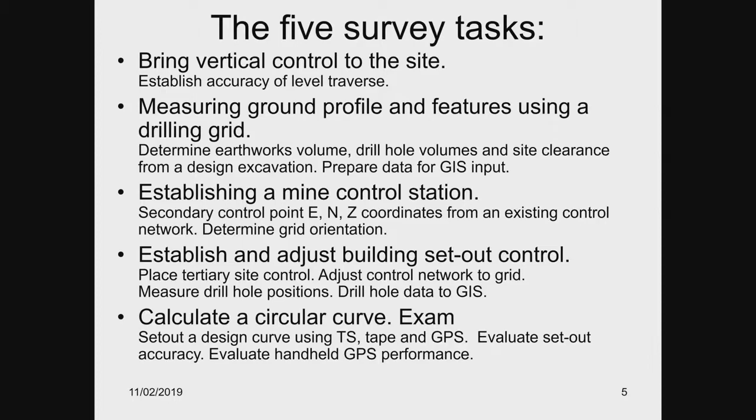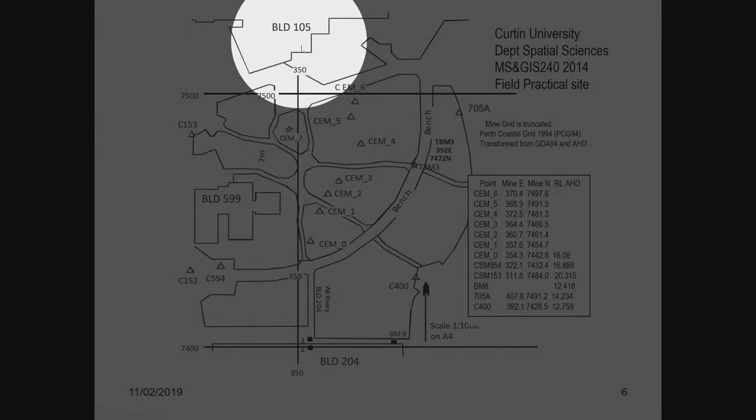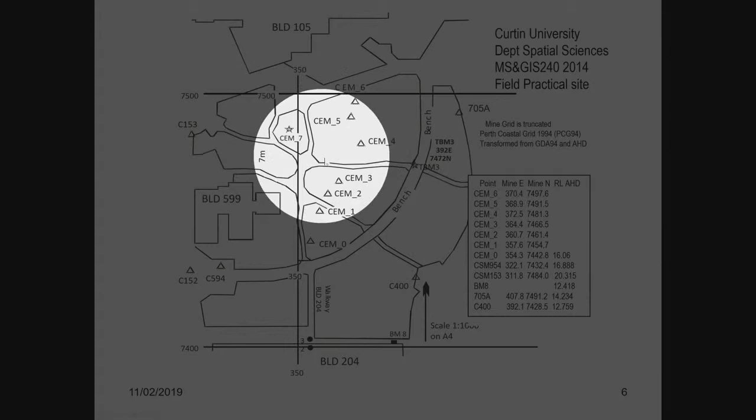So that was our site, building 204 with the engineering building, the library up there. There's 100 metres from there to there, 50 to 60 metres wide, and we were eventually working on that area there where we would put a mine grid. You can see the local coordinate system that I have in there.

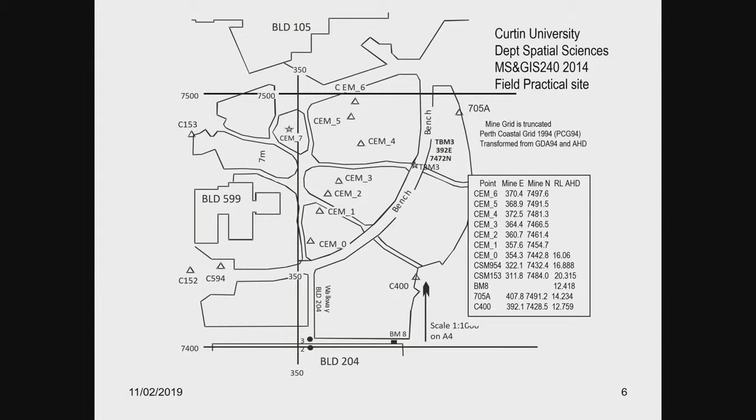These CEMs were just pegs that I put in the ground so that the students had to find the peg, do a site plan so that they could find the peg next time when they did it, because they would have the coordinates of it.

And the first exercise was a couple of things. We did a collimation test to make sure the level was working correctly within tolerances, that it didn't have errors in the line of sight.

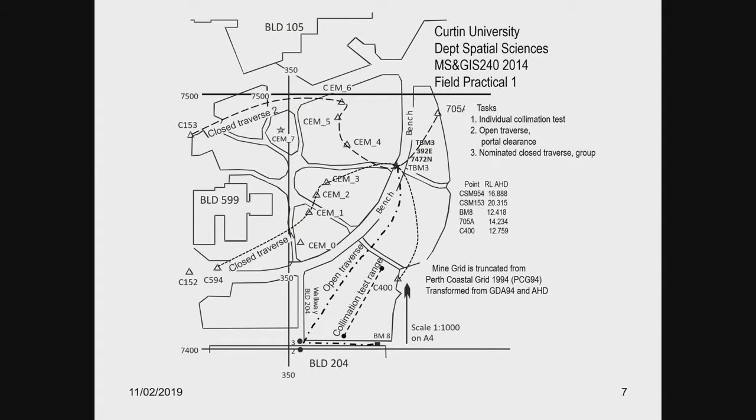We then did an open traverse, and I'm just getting used to this, from here up to a control point up there, a temporary benchmark.

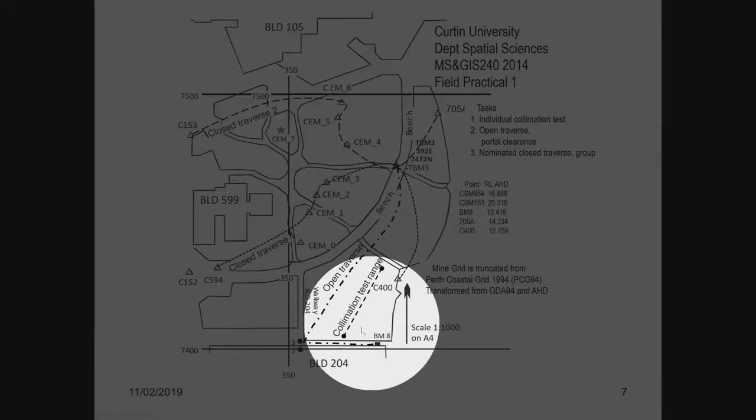Now, and also we've got a bridge across there, that's a portal. How do you find the height of a portal? There's I need 3 metres clearance for the material, for the machinery. Does that portal meet it?

And then we wanted to bring control in, so starting off at a control point, coming down, winding up somewhere else to between two control points, so that we could then do a closed loop traverse, which would allow us to see how well we had performed the survey. Did I get within - I'm allowed a tolerance of 15 millimetres around the circuit - did I achieve that? If I didn't achieve it, what do I do about it?

And so this was the closed traverse, and this was the first one because that one then allowed us to have control for the second stage, which was the blast grid. 6x7, which I'm reliably informed is a grid dimension. Is that right or wrong?

Okay, happy enough? Okay, not every student did that. We then had to split the teams because I'd be running about five teams of 4 students for this. So we give them a couple of lines to do.

They could collate that data, then they would have to share the data with someone else, which is all part of probably the team building thing that we're trying to get people to work together, to share the data that they've got. And then when you do that, you've got to make sure your work's all right because you're going to hand it over to someone else. And if they don't trust you, well, the whole thing's not going to work.

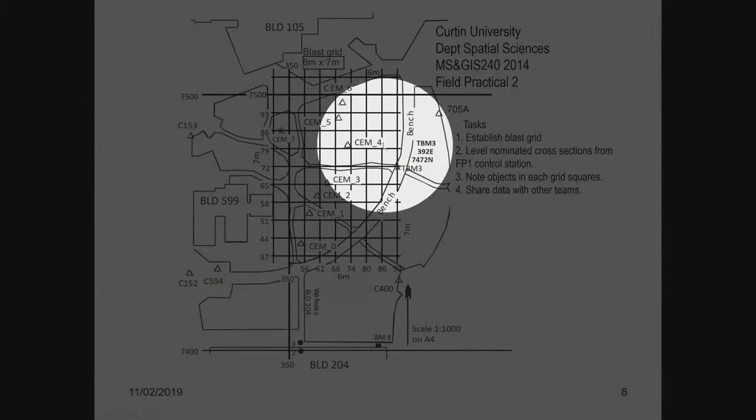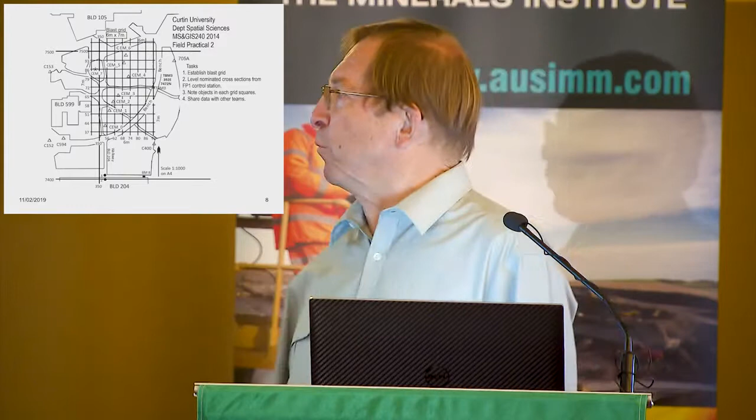We've got a bench running around there at about 15.5 metres or something like that. What volume, if I put some batters in my GIS and excavated down to the bench, what volume? What volume of drill hole? How big a drill do I have to use? I've got no clue. What size rotary drill do we use there for blasting, if this was blastable ground? Do we use a 10-inch or a 2-inch or what?

Those are the questions. Kids, what size drill do we use? How much do you pull out of the ground? How much spoil have you got to go back in? So we were looking at that.

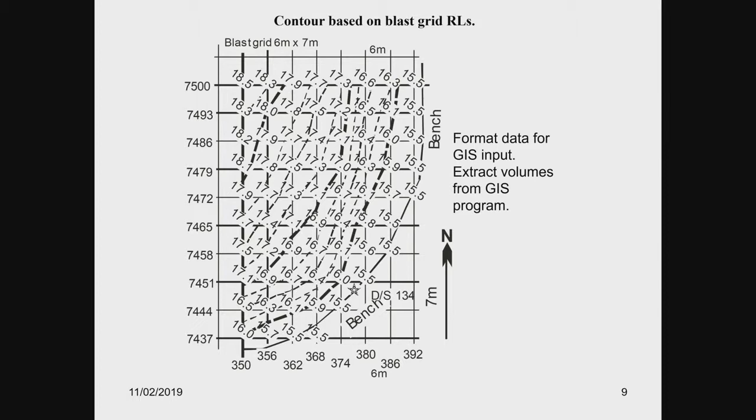From that, that's roughly what the ground looked like with the levels. And from there, if we're going down to the bench, we can calculate the volume in various methods. We can use the contour method of volume, or the depth method from each corner. Those things are done to death in the book on how they're actually worked out. So that would go into the GIS for them to pull it out.

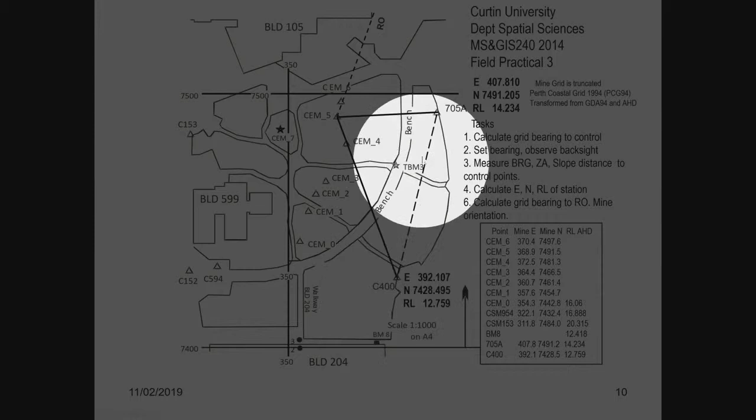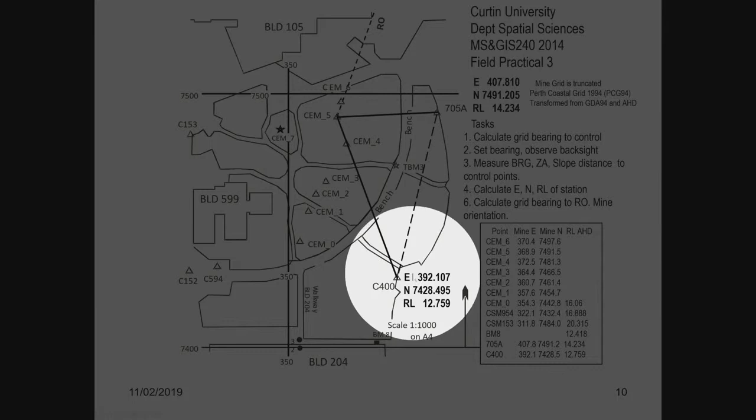The third one was, now let's get some control into place. I've got 2 control points there. They're in my local coordinate system, which have been tied back to the Perth coastal grid, which have been tied back to GDA, Geodetic Datum of Australia. We said to them, well, here's some points. They're about the coordinates. We had a surveyor run round and bang some pegs in and get some rough coordinates.

So what the students are expected to do, when their group is assigned to one of these points, is work out the rough bearing from your control points, CEM5 in this case, to 705A, so that when you're pointing at 705A, you can dial that into the total station. You then have orientation. We put a reference object, an RO, which was the side of the building here, so when they come back in the field the fourth time, because they can't see 705 and C400 because the bulldozer's gone through them, they've still got an RO.

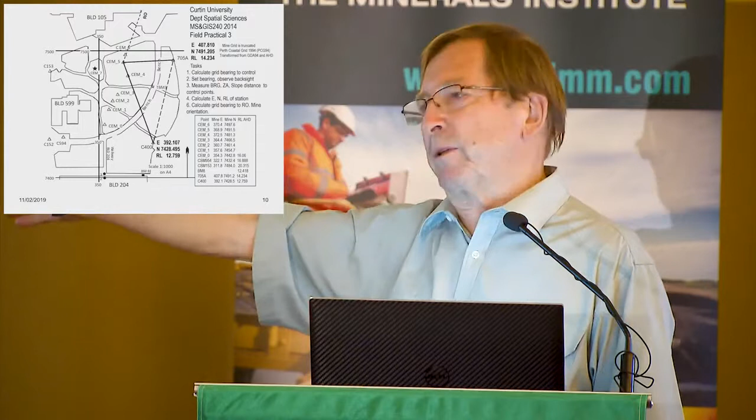They've calculated a better position for CEM5 because it was only rough. They've then been able to calculate an accurate RO, so that gives us our mine grid orientation. And that was basically that exercise.

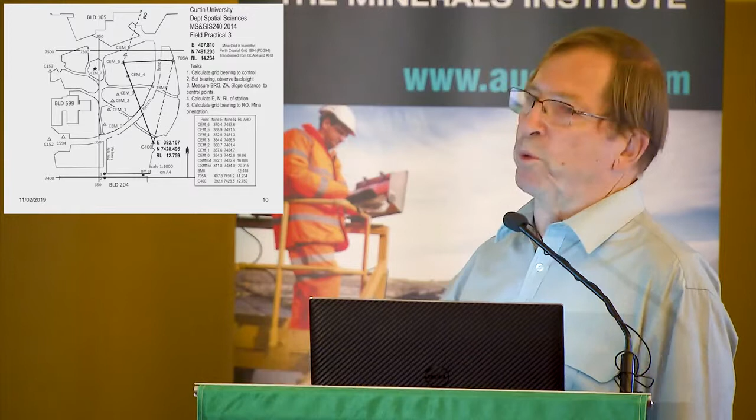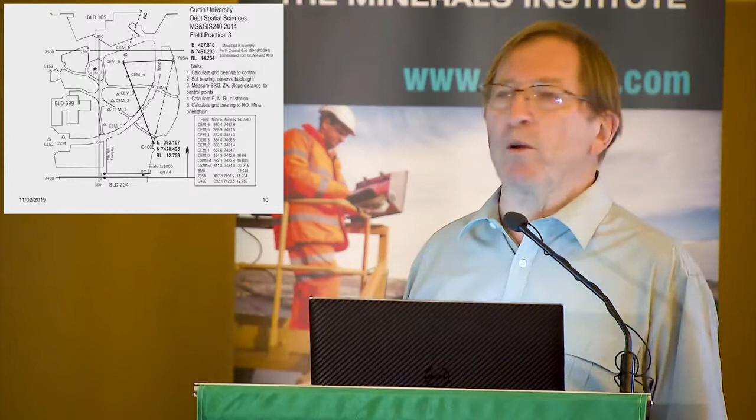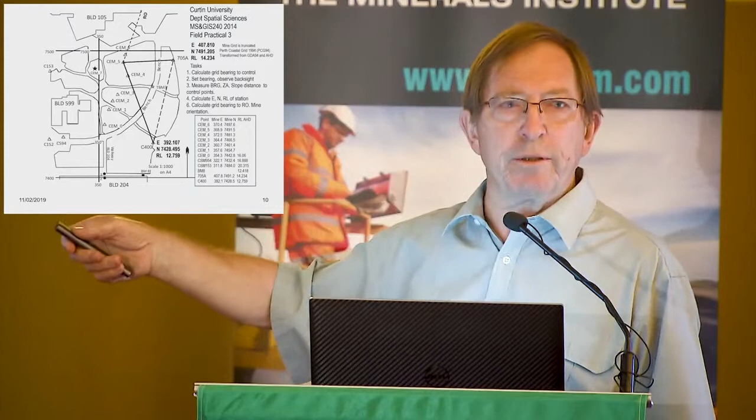Record the points so that you can do your station diagram to come back to it next week and basically find out where I am. CEM5 was part of the initial level traverse that we did, going back to the known coordinates and height of 705A and C400, doing a zenith angle and difference in height. How did my level traverse compare with what I did here?

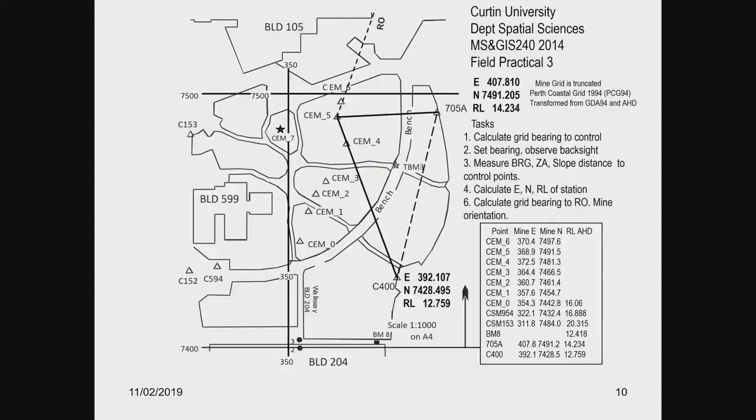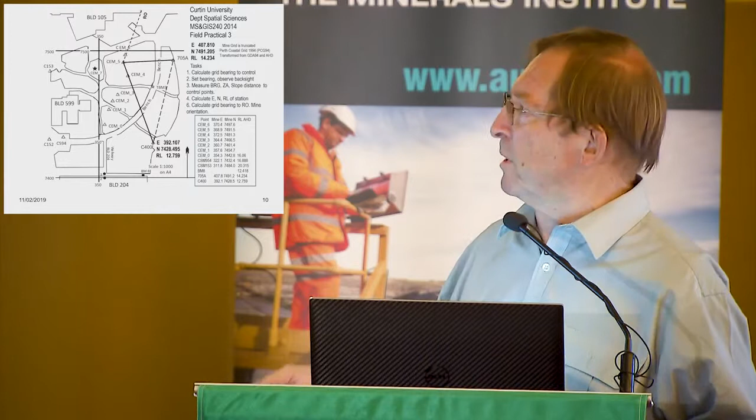Again, the idea is to show that there's more than one way of finding out an answer to any problem. Surveyors are very funny people, always employ a lazy person because they find the easiest way to do it. Except Chris has got a bad story about that. But there are more ways of solving a problem than one.

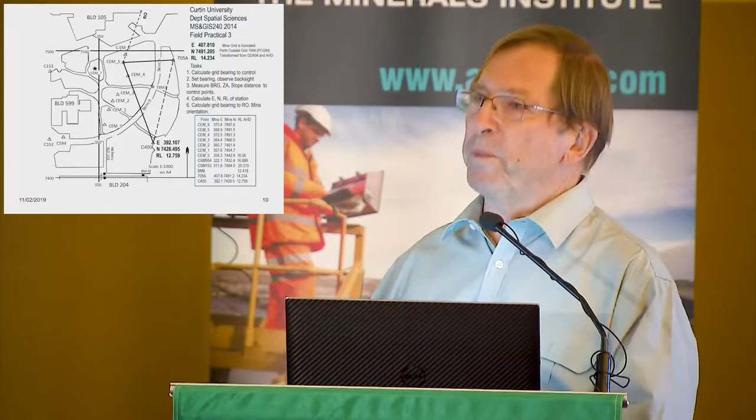Okay, so this is the third practical. We've established our control.

The fourth practical: we set up on the control point again, but now, because we've found out where our 3 drill holes are, it looks as though we might want to use that position. We're going to lose our control point, but we need extra control because we're going to put a structure there.

So we go and do a small survey from the unknown point. We've got our bearing up there, and we do a triangular survey around there, using what we call the Bowditch adjustment to get the best position for the coordinates.

So the tasks are: set the grid bearing to the RO. We know what it's meant to be. Align the total station to it, tap the numbers in. We've now got it lined up.

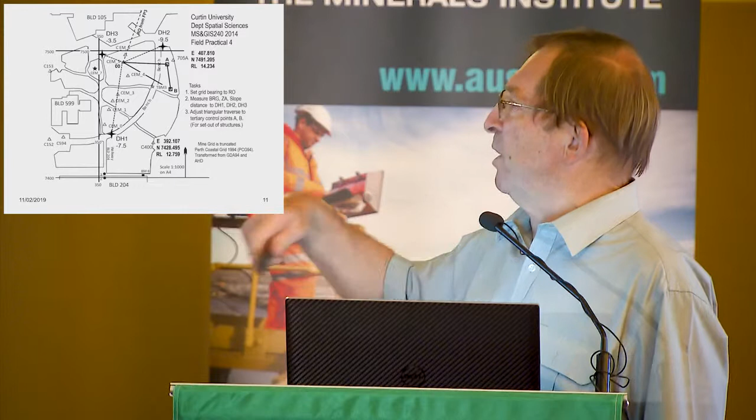Measure the bearing, the zenith angle, and the slope distance to the 3 drill holes, then measure and adjust the triangular traverse. What happens here is we set up and everything's aligned, so that's why we read the 3 drill holes to find where they are.

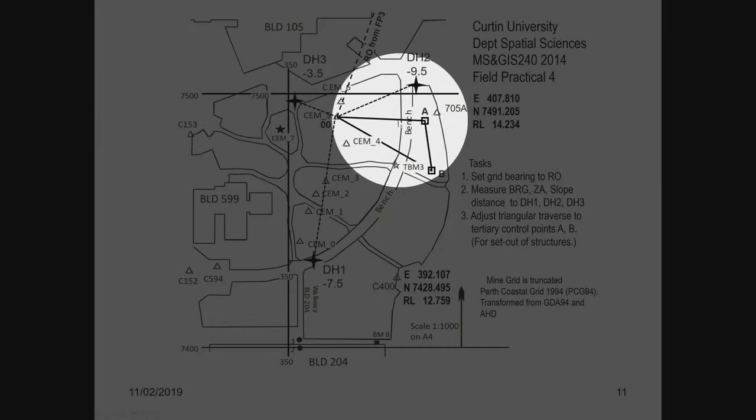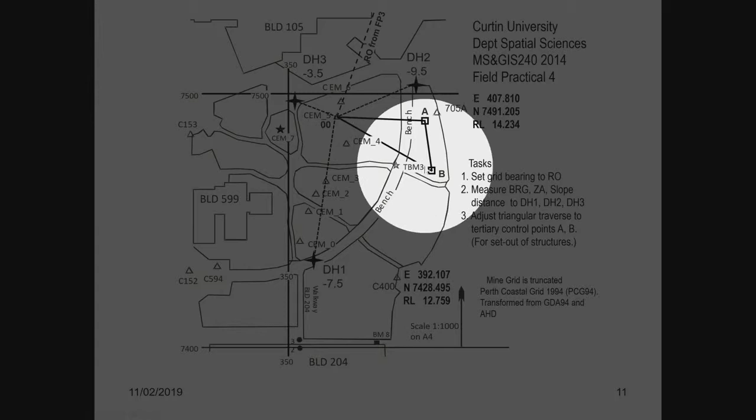We've got 2 reflectors on A and B, which involves taking the total station from here, putting it there, reading these angles and directions with a reflector there and the reflector there. Then we move the total station from there to there — this is known as the semi-forced centering method of doing a traverse.

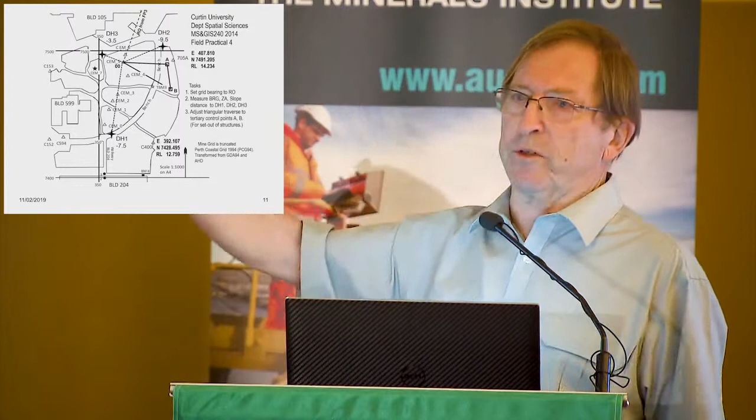So we've measured the 3 sides independently, and we can adjust it because we've measured angles, distances, and those sorts of things, and come up with a set of coordinates. The 3 angles have to add up to 180 degrees. If they don't, we distribute the angles through the traverse and adjust from there.

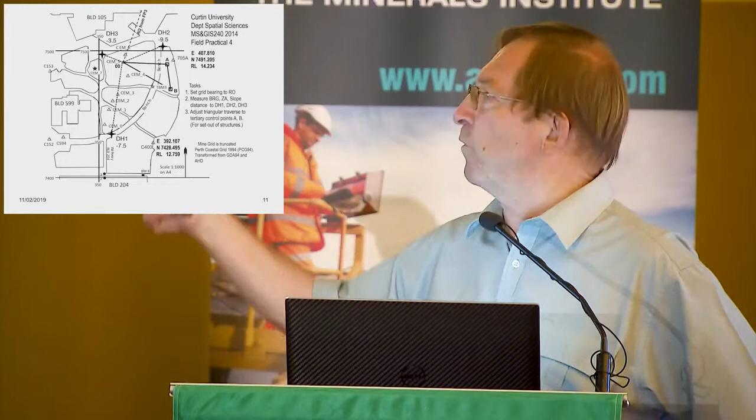Okay, so that's the 4 things that we do. From the mine site, in doing this, we will have generated levels for A and B — that's our mine level system, until we get someone to bring it back to the Australian height datum. It'll be roughly right, but we'll eventually want to tie it down.

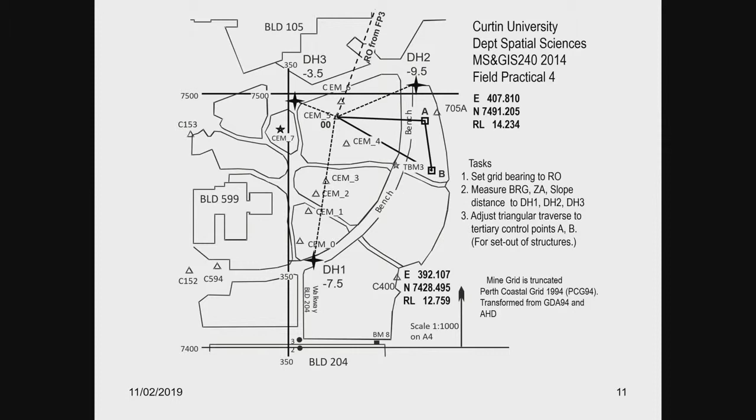So they're done. We've now got our 3 sets of drill holes, and we can put that into a GIS and work out the dip and strike. You guys will all know how to do this better than I can, but I've got some techniques anyway.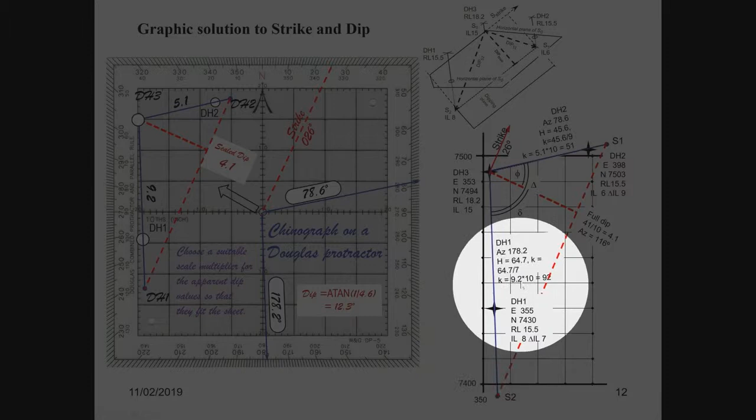The dip and strike — that's what we wound up with. That's where the drill holes were, and I've worked out the coordinates of them because we have bearing and distance, and we get an apparent dip angle there and an apparent dip angle there — this is solving it graphically.

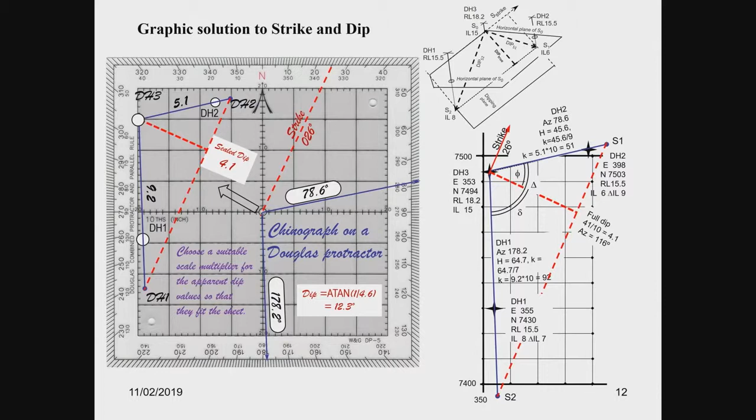How do we find the strike and the dip using the graphical method? In the book I've done this drawing — that was what we wound up with, the horizontal plane and the dipping plane.

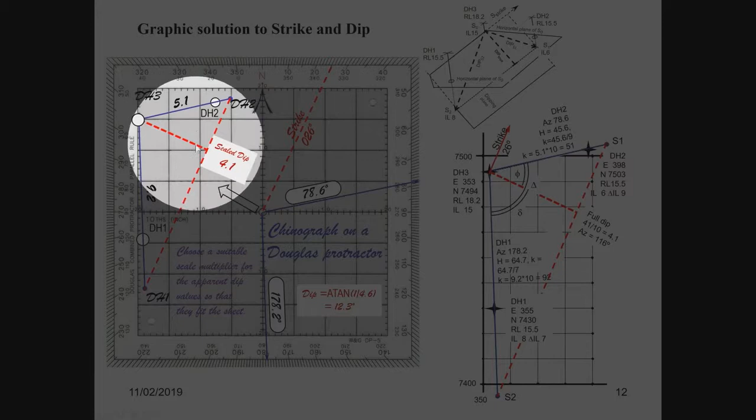The other day, because I love Douglas protractors, I thought a Douglas protractor is a pretty good thing to do this on. If you've got one, in the field you can actually do this in your field book, and before you leave the field you've got a pretty good idea of the strike and the dip of an inclined plane, if that's what you're after.

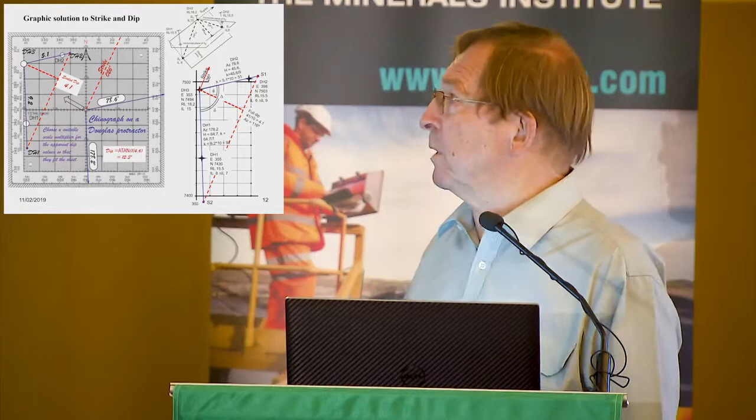I did a bit of this work when I worked on the Wollongong Dam, and we had to do a lot of dimensional blasting because of the ground there. There were lots of rocks with seams in them, and you'd have to set up the theodolite on top of the rock, find the strike line, and work out what the dip was so the guy could bring a drilling rig along and drill down 2 or 3 metres, so we could pop the rock off the top of a seam, because the Wollongong Dam was a notoriously difficult place to work.

The main contractor actually made his fortune out of that because of the dental concrete they had to do — there was this 50 square metres of dental concrete, and by the time they got there it was about 5,000 square metres, just slipped in as a nice little extra. Multiplied by 1,000, they'd made a fair amount of money from dental concrete, because they needed a stable base. Geologically, the Wollongong Dam, looked at in the 20s, really wasn't a good place to build a dam, but we needed a dam, and with more modern techniques it was put in.

I worked on that — I was with Bell Brothers, put the curtain in — and it was quite interesting working on the dam from a survey point of view, setting it up. Anyway, so that was just introducing dip and strike and how I've handled it in the book. I've also handled it mathematically.

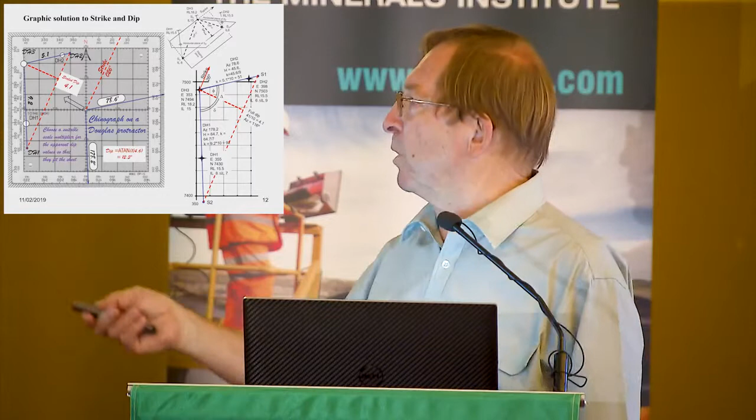The fifth thing was an exam. What have we learned? How can we test people? We're trying to do a lot of things. You notice I haven't said anything about GPS yet.

GPS for mine work, for precision mine work, leave it to the surveyors. There's RTK, there's $50,000 GPS sets for positioning and everything else. Leave that to the idiot surveyor with the adjustment programs.

But the handheld GPS, now that we're used to working to a couple of metres, and even your telephone will do it, we tried this thing, well, we want to show the engineers what you can do with a handheld GPS.

We also want to see how well, perhaps you've learned something like setting out a building or whatever. We want to see how you design a road, or what the parameters are that when you design a road, what you have to do. So we thought, righto, let's set out a road.

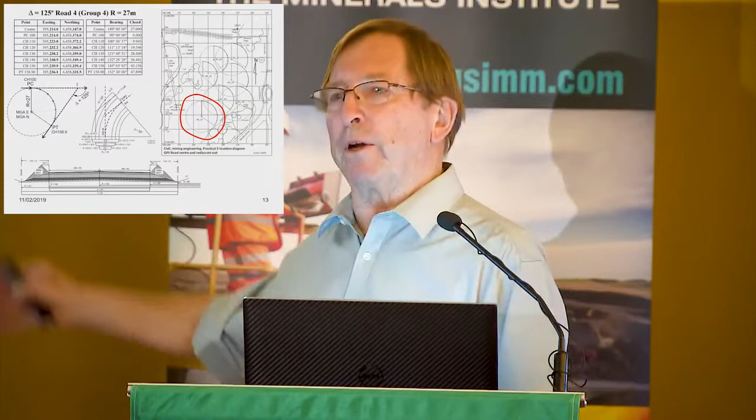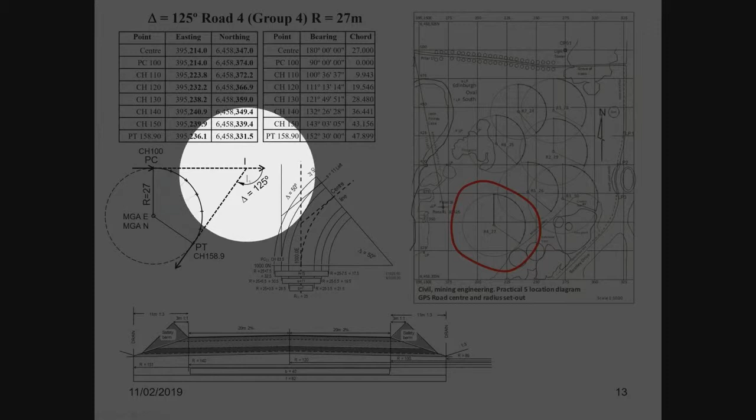We actually set a whole number of roads up on Edinburgh Oval, so they're all about the same, 30 to 25 metre radius. So Road 4, or the one that I've circled, the road comes in like that, bends to 125 degrees, comes out.

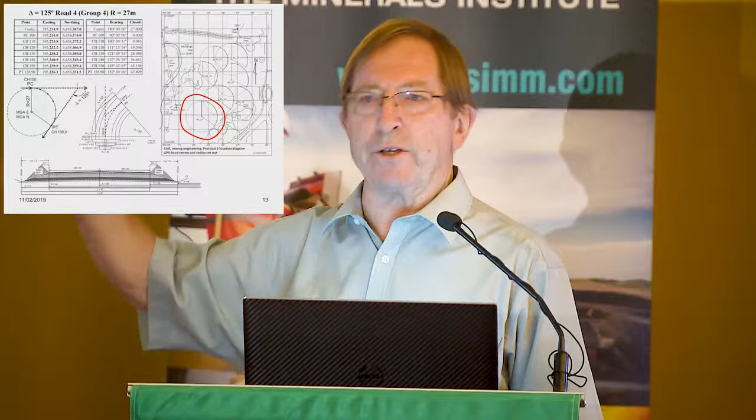The idea is to peg it around at 10 metre intervals. Set your theodolite or your total station up, peg it out using a total station and tape. Having pegged it out, now what techniques do we use to check how good our work is? So the technique we use is...

Measuring the chord distance between that chord and that chord, because they're 10 metre arcs, it's slightly under 10 metres. Now, if you get 9.95 metres or whatever the chord distance is meant to be all the way round, then you know the curve's been set out correctly because the numbers fit. But if it wanders in and out, then you haven't set the curve out correctly.

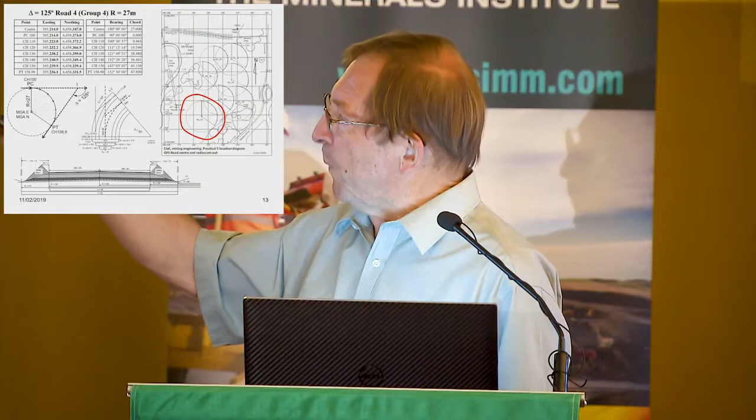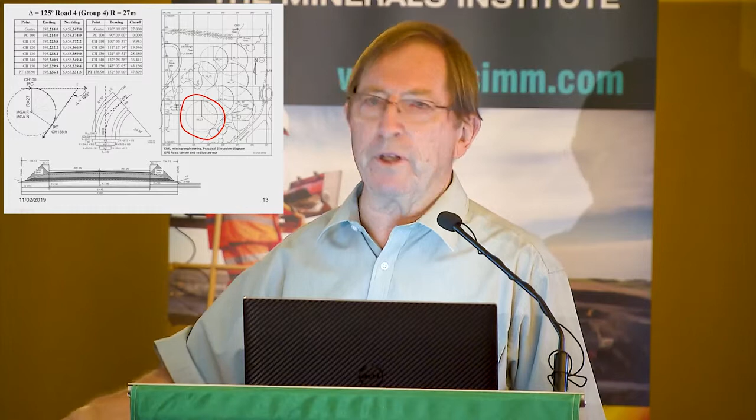We then come back with the GPS and measure the set out points, and the point of curvature here and the centre had been set out with the GPS to start with, so there's all sorts of movements going on. What sort of misclose am I getting at the metre, and the machine only reads to the metre anyway, what sorts of miscloses am I getting with it?

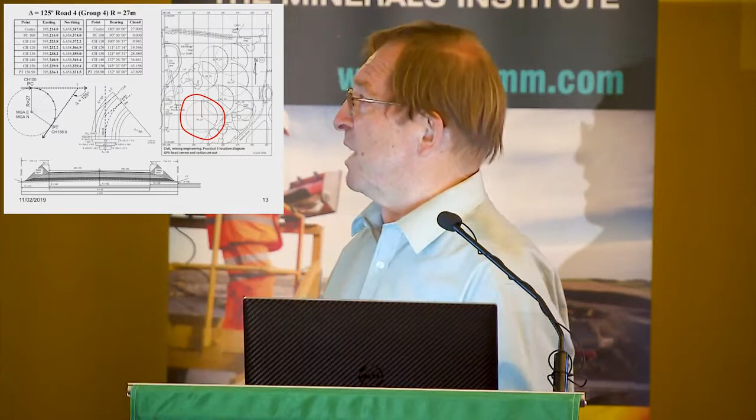The data we've got on the top, road 4, is the coordinates in MGA, which is of course what comes up on the screen of the GPS, and there was the chainage points, the direction and the distance to the chainage points as setting it out. Now, setting that out is no different from setting out a square building or something and measuring diagonals to make sure it's square. So nothing too horrendous in that.

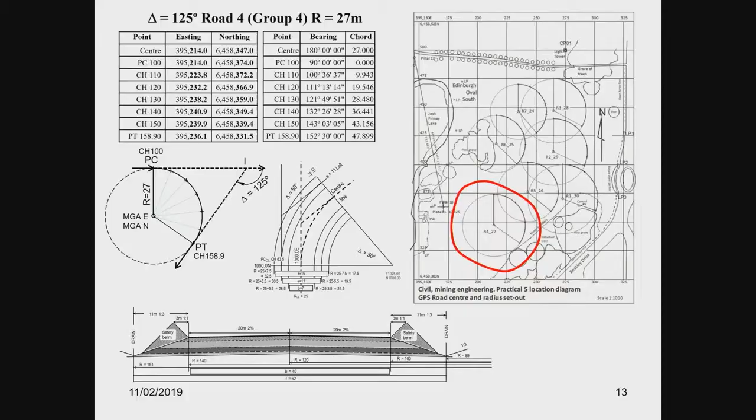On the bottom, I've got a drawing that I presented to them. This is a bit of a haul road out of a Caterpillar handbook. Yeah, they're that big. And because mine engineers, especially undergraduates, haven't been out on site and seen them, they just don't appreciate the scale of what's going on.

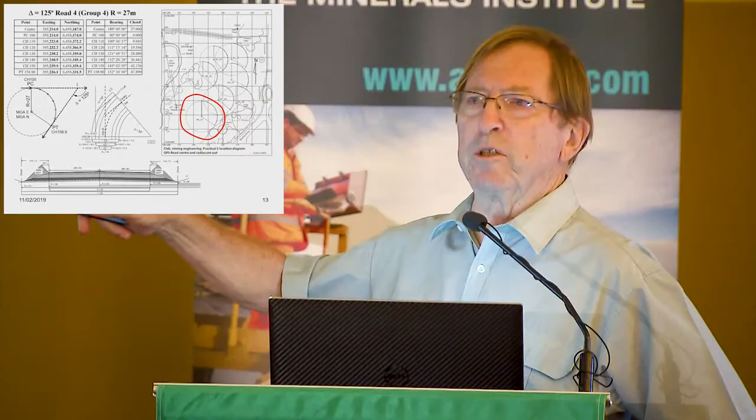So we put those in, and they had to actually calculate curves like this, but we're real nasty - every student gets a different curve. So you might be able to help each other, but unless you're the smart person that's written the Excel program and flogged it to your mates, you're all going to have to calculate it by hand.

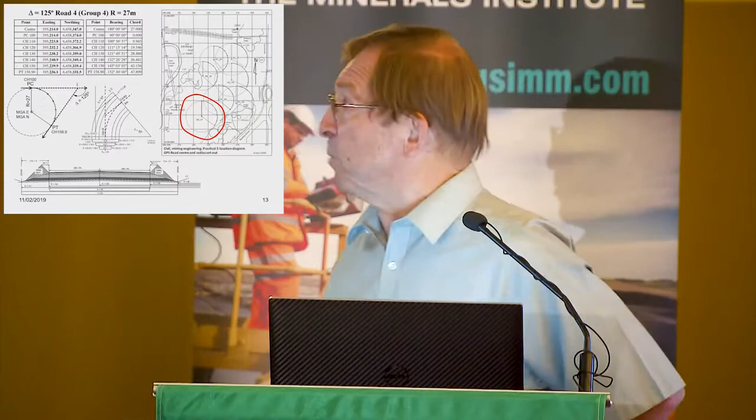So that was what we were trying to do with the course, and we can get through that, and we think that it's worked fairly well. So the conclusion: we tried to provide survey theory and practical work methods for the engineers. The individual workload wasn't meant to be too onerous. We wanted a realistic scenario of what was going on so that they could gain practical skills and observational skills, put the results in fairly simple plane geometric terms, and make critical decisions about your field work.

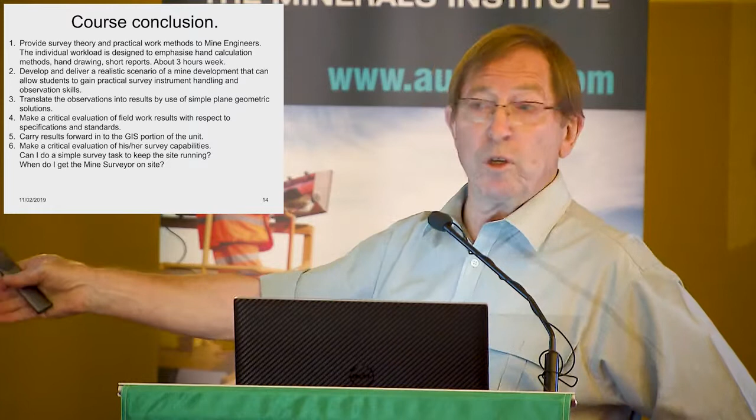Is the work good enough or not? Do I meet specifications or not? If the surveyor hands me this with these tolerances, do I pay his bill, or do I tell him to go and do it again? If he's just missed the tolerance and it's not important, maybe we'll pay his bill. If he's missed it badly, he's just got to go and do it again. I'm sorry, I'm not going to sign that off, because I, as the engineer responsible, am not going to take responsibility for your crook work.

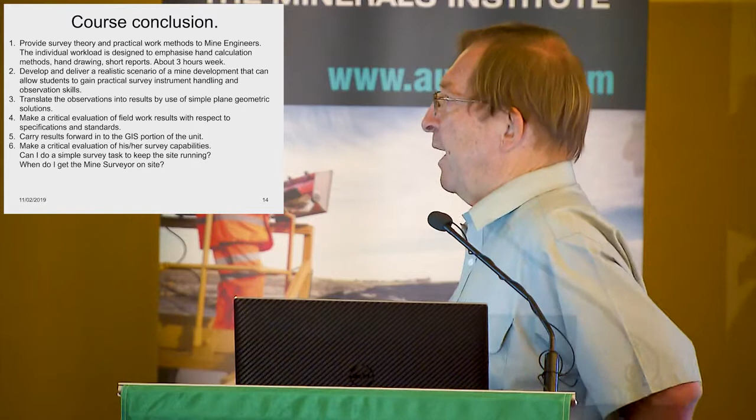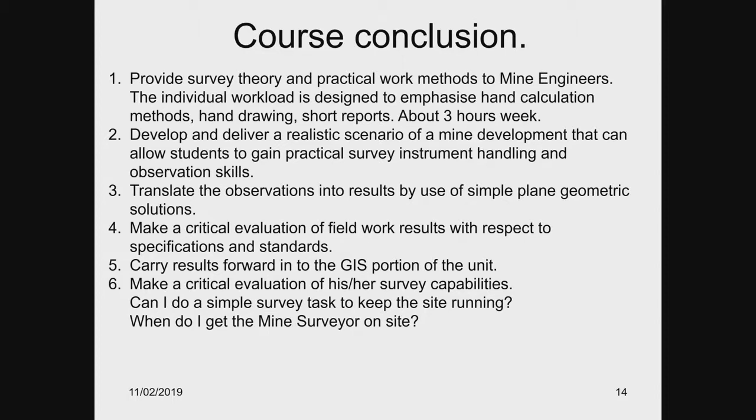We wanted to carry the results forward into a GIS unit and make critical evaluations. Can I do a simple task that might keep the site running? I put this to Chris and he said, Christ, no, we'll get the surveyor in a hurry from Perth in a jet. But when do I get the mine surveyor on site if I don't have him? Looking at the amount of survey work on an active mine, you've got the beggar there anyway, because it seems as though they're doing an awful lot of work by the time they get the data and put it onto plans and keep plans up to date. I mean, I think there is a lot of work there.

I've done a bit of extra work. We were talking about sloping sites, so mere idle curiosity for me, and I won't bore you too long. I've got a slope and I want to put a circular pad on the slope. How much room does it take up? How do I calculate volumes? Because I go to any textbook, I can't find any of this.

And it was the strike and dip work that I worked with that allowed me to develop it. So if I put a pad on the strike, the pad's on the strike line there and comes forward a certain radius, that's where the toe of the pad is on the particular slope that I've got. And it covers a fairly big area. If I go around and come here and put the pad on the strike line, I've got cut there, I've got fill there. How much is how much?

And especially if I've got to do things like compaction every 200 or 300 mils, how much compaction do I have to do? How do I work out volumes and areas?

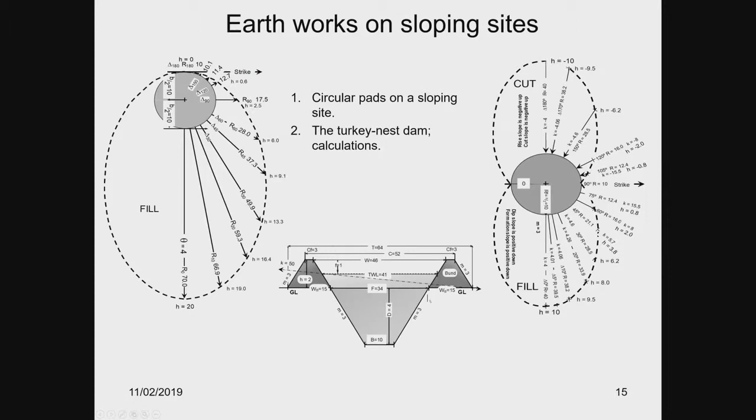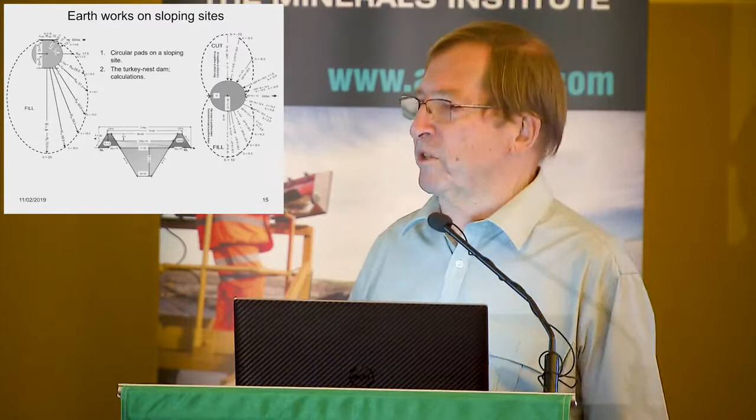And the last one, because I came off the land and I'm interested in them, the Turkey Nest Dam. Everyone says, well, you want to build a Turkey Nest Dam, you get a bulldozer operator and say, build a 5-acre dam, and he goes and builds a 5-acre dam. But I thought, well, there must be a bit more to it than that, but I can't find anything. So over the summer I sat down and ran through the numbers, and now I've got an idea for me how to do this. Whether anyone else is interested in it, I don't know, but it's just something for fun and entertainment.

And the last thing we're doing, this is more modern. Andrew Jaros from Kalgoorlie worked on it. Brendan McCormack started this off in about 2000, using these wall stations. Who's familiar? Anyone seen those or seen the idea? Of course, traditional surveying, we've got the backsights which are now 50 metres up in the air. You can't put a point on the ground because it's going to get run over or covered over. At one stage we used to bolt a bracket onto the wall of the mine and then set the total station and the targets up on those permanent fixtures. And then, back in about 2000, they said, well, we've got these prisms from Leica which have a zero - it doesn't matter which way they point, you'll always be centred.

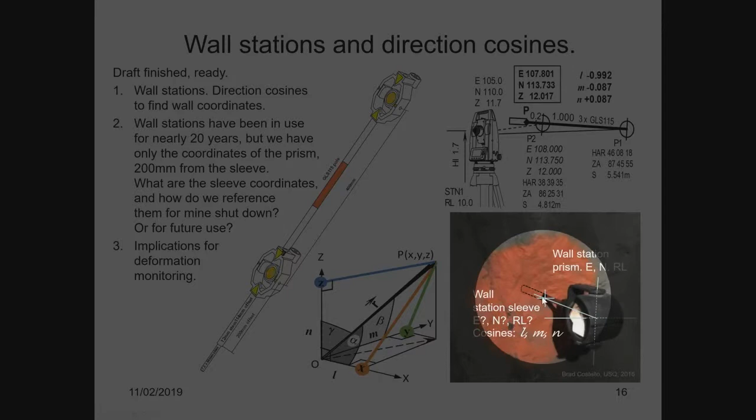So no matter what the orientation, you're measuring to the centre of the prism. They put a stem, so it's about 200 millimetres from the stem to the centre of the prism, and then they drilled a hole in the wall, put a tube in it, and you slip the stem into the tube. And so you've got survey control. You do a free station survey where you set your total station up anywhere you want to, take a couple of backsights, and with resection you know where your total station is, so then you can fire forward to one of these and determine the coordinates of that point, and so you can continue your control down your mine using wall stations. Next time you want to come back and do some more survey work, you slip a couple of these prisms on their stems into the wall station, set up a free station, resection, and away you go. And this is a very popular method of doing it now - well, it's almost 20 years old now, I suppose.

But my question - the mining rules say when you close a mine down, you have to have the coordinates of your control points. Now, is the Mines Department going to accept something stuck out on a stem? This is about the only configuration going at the moment.

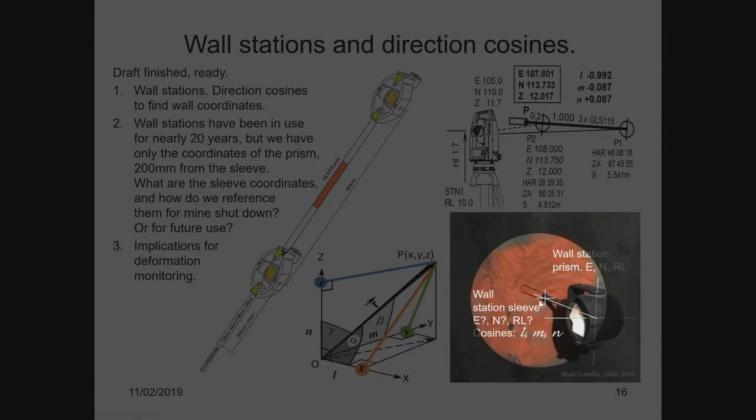Are they going to accept those as the coordinates, or do they want the coordinates back here at the sleeve? That's the question no one's asked yet. I talked to a mining surveyor the other day who's not mining anymore, and he said no one's asked that.

So I've just gone around and worked out a method of actually transferring the coordinates back to the wall sleeve, and I've got direction cosines which just tell me in three dimensions which way the coordinates are going.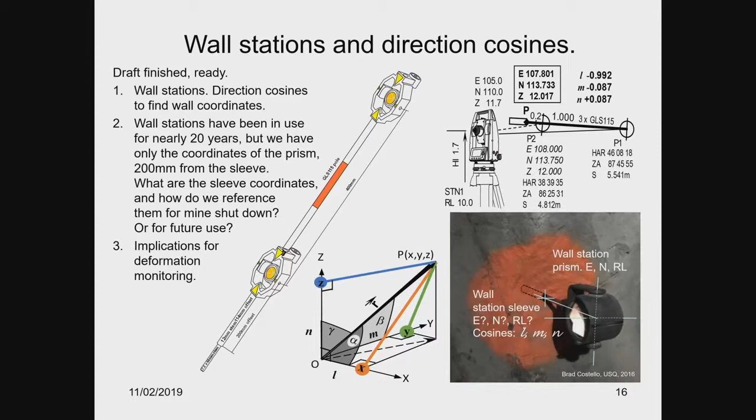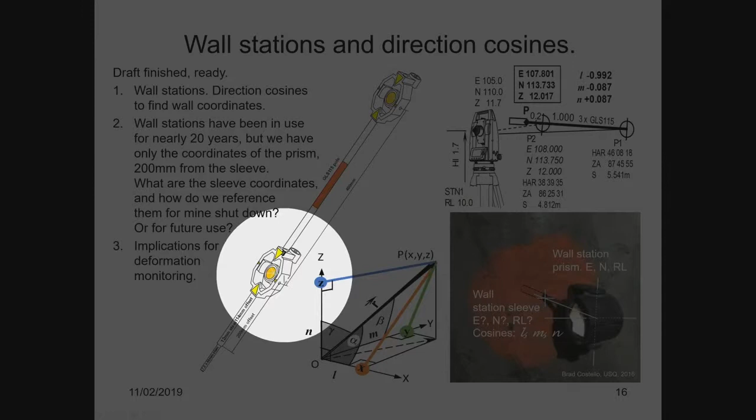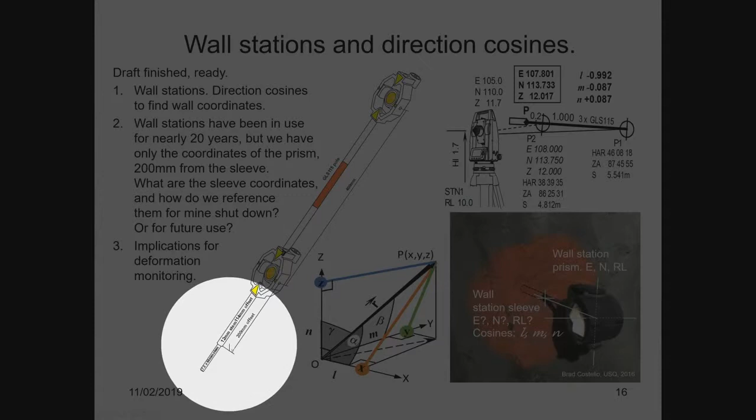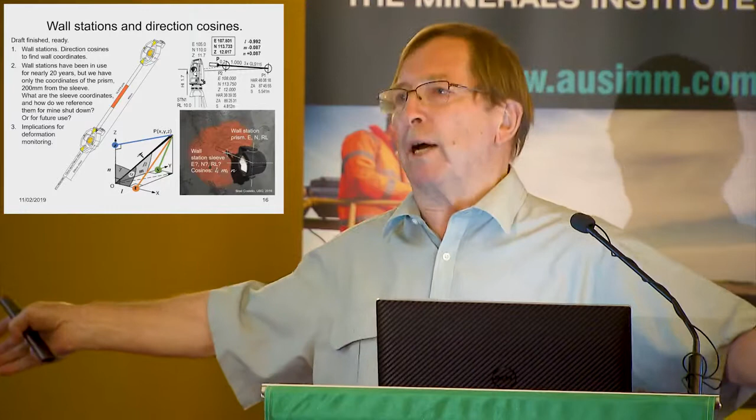So say that's my wall station, I survey that one in, take a reading there, and it's 200 millimetres through the sleeve, and I've got another 400 millimetres up there. Because I know where I am with my total station, it's oriented, I know where those two are, then I can basically slide that prism down to this point, which gives me the coordinates of the point, but solving that triangle also gives me the directions of it. So I could come back in a couple of years' time, slip another stem into it with a different prism, and using those coordinates and the direction cosines, regenerate that position.

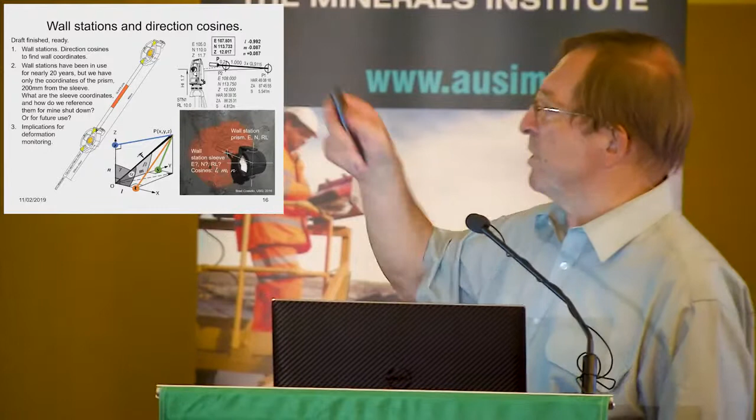I've put this up, I've written it up, and you're the first blokes to see it. I don't know whether it's really of any interest to anyone or not, but they're the sorts of things I've done.

All this goes into the book we're producing because it's basically impossible to find this anywhere else. Schofield and Breach, one of the engineering books, has got it. The other one I'll go back to is F.A. Shepherd, who was teaching in England. He's the only one — this is in the 60s, 1968 was one book and 1981 was his second book. This is the only thing that works on dip and strike that I've seen, apart from half a page in Schofield and Breach. So there we are.

People I have known. Graham Sands, I met him a year or so before he was killed at the Canning Dam when they were chasing GPS satellites.

Peter Livings, he ran the photogrammetric company, and he was processing data for Aerodata because they used to have an 8mm camera in the bottom of the aircraft, and every time they took a magnetometer reading, they took a photograph with the 8mm and transferred it to aerial photographs. Then Peter got the coordinates off the aerial photos so Aerodata could put them back into their mag maps.

Peter Clifford, I've worked with him. Tim Gill worked with Peter, this is back in about 95, 96. Yeah, they're the people that I've worked with.